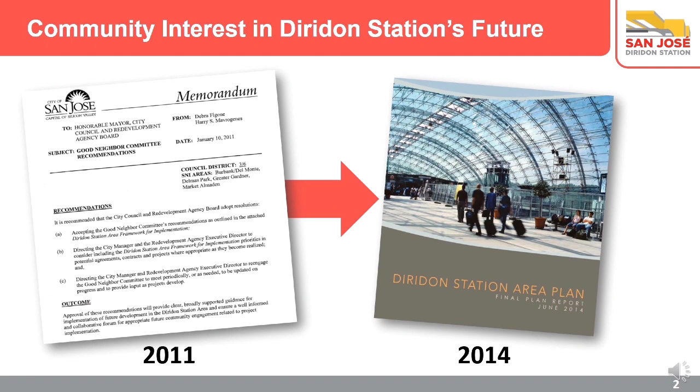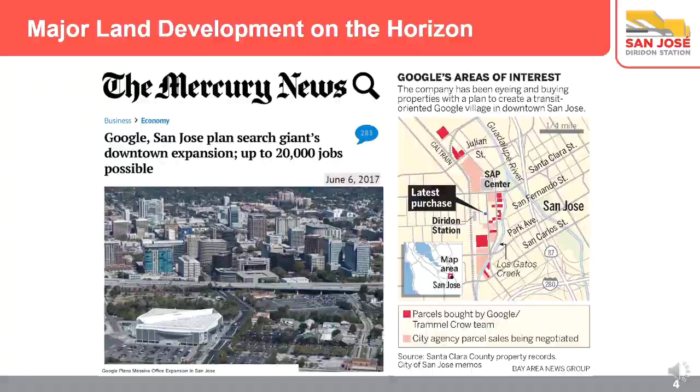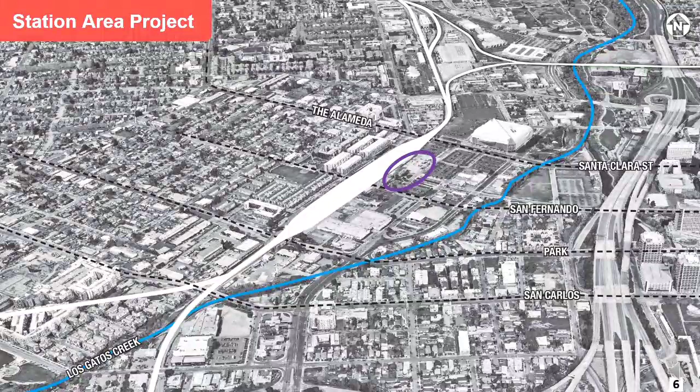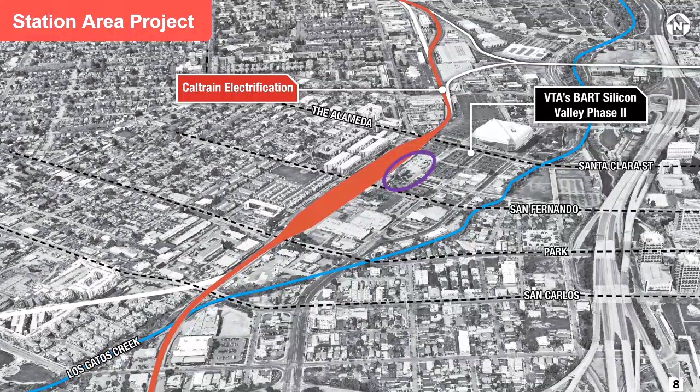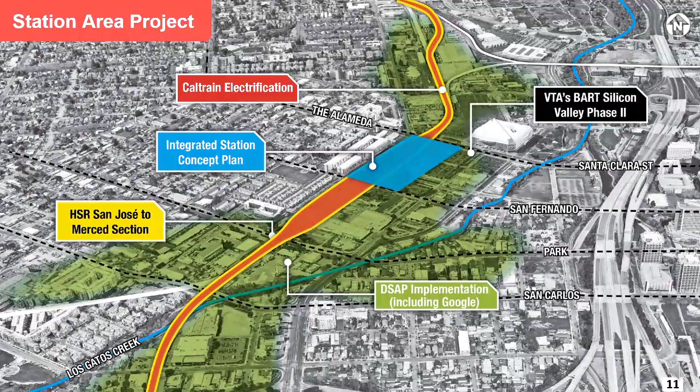What we're working on is thinking about how the Diridon Station will evolve and change into the future. We have many advocates who have been thinking and working with the partner agencies on what the future could be for Diridon, including helping with lessons learned from different examples, thinking about different policy issues. SPUR in particular has been very engaged, and they were a major reason that Santa Clara County leadership was able to take a 2017 European station tour to look at how to integrate transit stations better with the urban development.

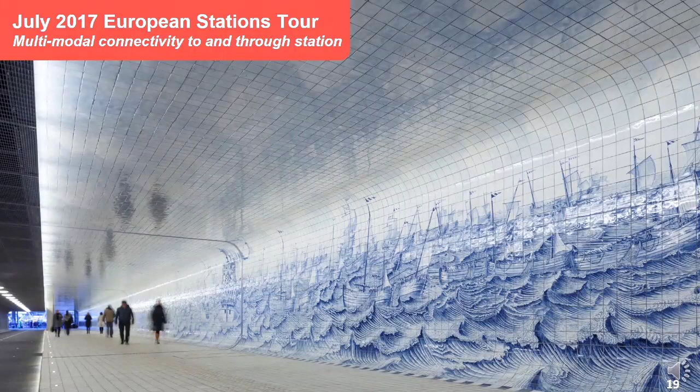We also visited stations in Amsterdam and got to see how the station itself can have connectivity both to development as well as different modes, and how important multimodal connectivity is, not just to the station from parts of the city, but also through the station in terms of bikes and peds and different modes, and how that space can really be done in a lively way, in an artistic way.

So the four partner agencies, when we came back from the trip, decided to get together and enter into a cooperative agreement, a formal co-creation environment where they are working together to think about how to integrate Diridon Station, not only as a multimodal transit center, but how it relates to the city. So it is a twin project of city building and transportation.

They created a vision for the station. We really want to deliver a world-class transportation hub that provides seamless customer experiences to move between the modes, but also to move between downtown San Jose and the neighborhoods to the west.

In the beginning of the planning process, we started with developing key objectives. These are things that would be a touchstone throughout the planning process to help the partners measure different options or ideas, including how well the station is multimodal and integrated and human-centered, really speaks to the passenger experience.

We want the station to become a catalyst for the urban environment. We want it to support land uses and really inspire a good sense of place. We also want the station to be a destination, a place that people like to come to, that San Joseans can come and hang out at.

We want to create a compelling vision for the future, both in terms of something we will be reaching for in the long term. This is a long-term project, and we want to understand why it's important to keep doing it.

In the wintertime, we started looking at key elements like how the tracks and platforms relate to the station's center of gravity, where the entrances might be. In the spring, we started to develop possible layouts, different combinations of the elements into an organized layout. Over the summertime, we worked on optimizing.

And throughout that whole process, we talked to the community about the different themes that were important, about pros and cons, about priorities, and received feedback throughout, which has helped us develop the concept layout we're going to show today.

So just a quick overview: what is a concept plan? What we've really been focused on in the last year is the fundamental functional elements as they relate to each other in the space. This is an example from a Dutch project brought to us by Team ABC, but it demonstrates the Lego blocks that become the organizational foundation for the station elements. We're going to talk a little bit more about that.

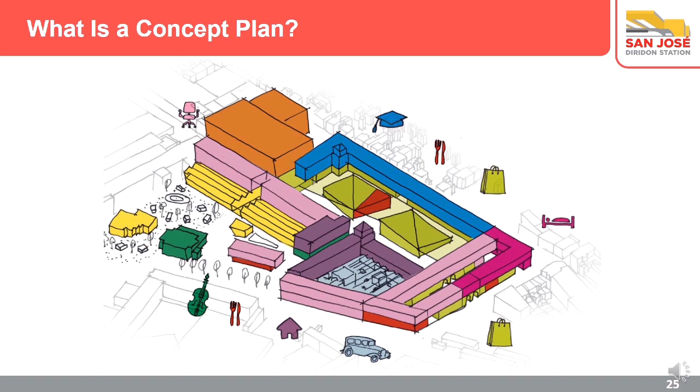So first, we started with the big moves, and we looked at how the northern rail alignment and the southern rail alignment work, coming into the station from San Francisco and leaving the station to go towards Gilroy. We then looked at the vertical platform position.

Should they be up in the air slightly? Should they be at grade? And then we looked at different station locations, and should it be at San Fernando Street or Santa Clara Street? We're going to show a little bit about that.

So these puzzle pieces, or Lego blocks, become a really important foundation as we start to explore how to insert the kit of parts: the pedestrians and bikes related to the station entrances or station locations, how the BART station relates to the station entrances and transfer times for passengers between the heavy rail modes and BART, how the VTA light rail and VTA buses would be organized relative to the station entrances, the public spaces, and the commuter rail corridor, and finally how taxis, TNCs, and automobiles would access the space and where we might imagine parking could be located.

Over the last year, we've presented three different types of layouts. These layouts represent a spectrum of different combinations of the big move and the kit of parts. We started with one that was at grade at West San Fernando Street, so the station center of gravity was really oriented and anchored at San Fernando, and then we organized the elements accordingly.

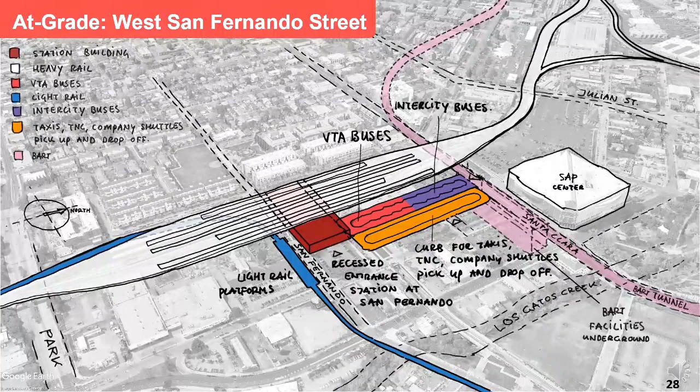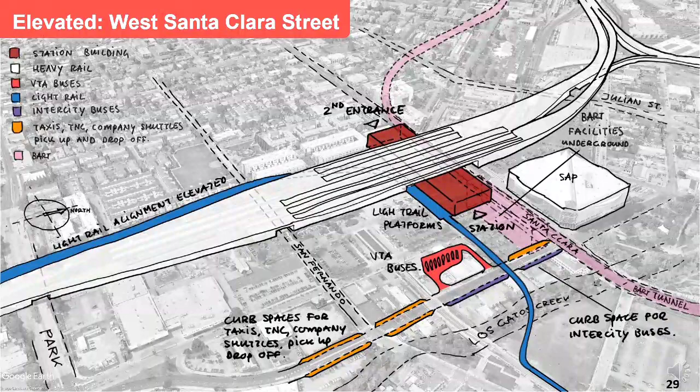We had one that is elevated at West Santa Clara Street. So the station platforms now have been raised slightly into the air, about 25 feet. The station center of gravity was really oriented at Santa Clara Street, and in this particular case, we actually attached a northern and southern rail corridor that contemplates an I-280 viaduct.

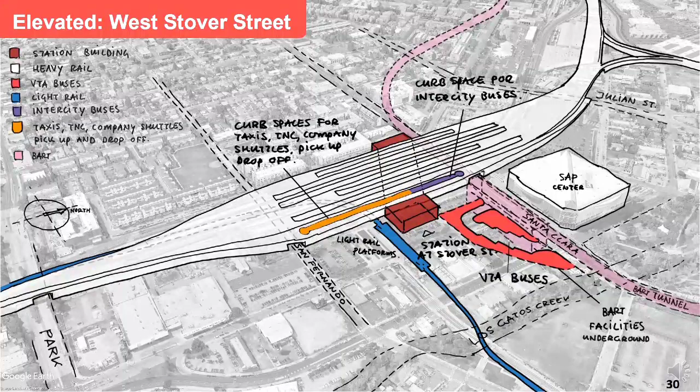And then we had one that was an elevated station with a West Stover Street orientation. This elevated the station platforms, but oriented the center of gravity kind of in the middle between Santa Clara and San Fernando. What we were trying to explore is the different ways that these elements would create a passenger experience and how the modal elements would function.

We also did several community events, including several community open houses. We did a significant Big Moves workshop in September. We've presented routinely at the Joint Policy Advisory Board, and we presented throughout the year at the Station Area Advisory Group. So we've done a lot of different events to reach out to the community.

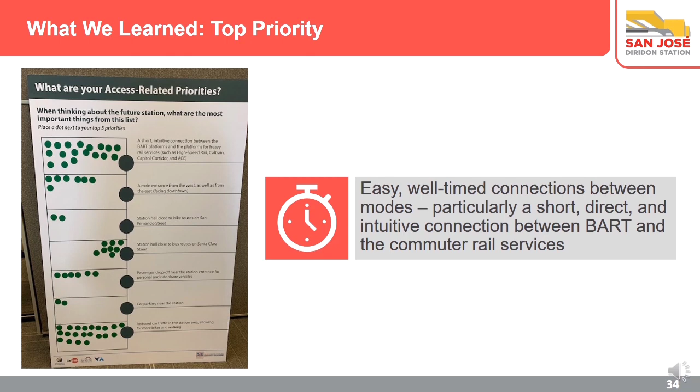In terms of general community aspirations, we heard these several items over and over as we did community outreach: improved transit serving the station, a highly visible and iconic station, creating a place with activity centers near Santa Clara Street. Our community wants vibrant indoor and outdoor public spaces. They really want a street that's pedestrian and bike friendly while we're reducing car traffic, and we really want to make sure that there's a potential for future transit-oriented development around the station.

So that sort of gets at and echoes what the partners had identified as the twin pillars in terms of transportation blending into city building. We heard that from the community as well.

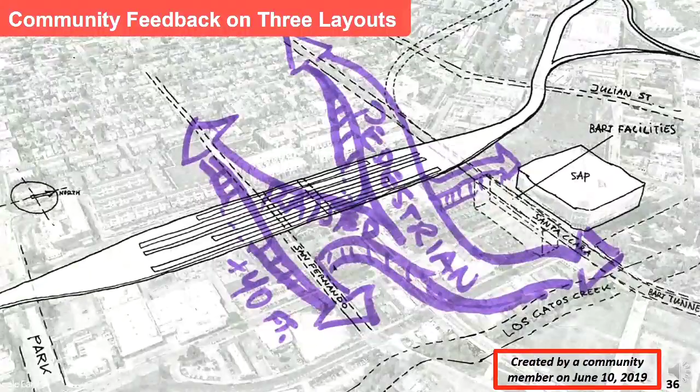We also heard many, many ongoing questions. I always say when I present that this part of the planning process will raise more questions than it answers. So we hear a lot about what effect the increase in train volumes would have on property impacts, and will it create safety issues at at-grade crossings?

We hear a lot about whether construction and increasing activities will result in disruption to nearby neighborhoods. Will the expansion of Diridon Station lead to displacement? This is an extremely important topic of discussion, not only in San Jose, but in the Bay Area region in terms of community displacement.

We also get asked quite frequently about how this project relates to the high-speed rail project. How will parking work in the area? What are we going to do at the historic depot? How are we relating to the Google project? And how will we have a direct airport connection? So again, lots of questions coming up, and as we advance the planning project process, we will attempt to start to unpack and answer these questions.

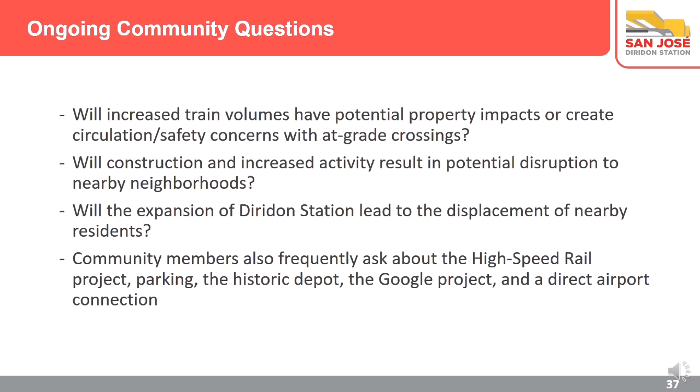So we're going to present now the recommended concept layout. I'm very pleased to show three major decisions that the partner agencies are ready to put forth as a staff recommendation to the policy body, anticipating City Council and the three transit agency boards would accept these recommendations. We're going to step through each one of them.

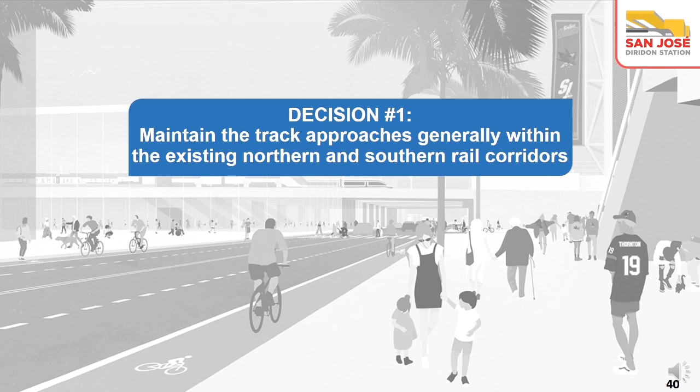Decision number one is to maintain the track approaches generally within the existing northern and southern rail corridors. This is an overview of that recommendation and what it would look like: coming in from the north on the Caltrain corridor, generally in the same right-of-way as today, moving through the station to the south towards Gilroy in roughly the same Caltrain and Union Pacific right-of-way that exists now.

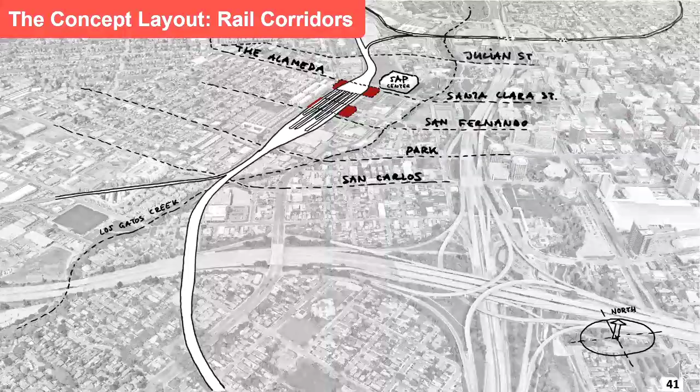When we started doing the technical analysis, we got asked over and over again to think about future-proofing the rail corridor. Rail corridors are 100-year investments, and we wanted to make sure we were looking at the right investments for the future to ensure we don't come back and have to rebuild things or underserve capacity. So we started by exploring to the north and to the south what that might look like.

This image is based on conceptual design done by the team Arcadis. It contemplates non-electric diesel tracks, which we will need to continue to operate ACE and Capitol Corridor and the Union Pacific trains, as well as new electrified track for Caltrain and California High-Speed Rail.

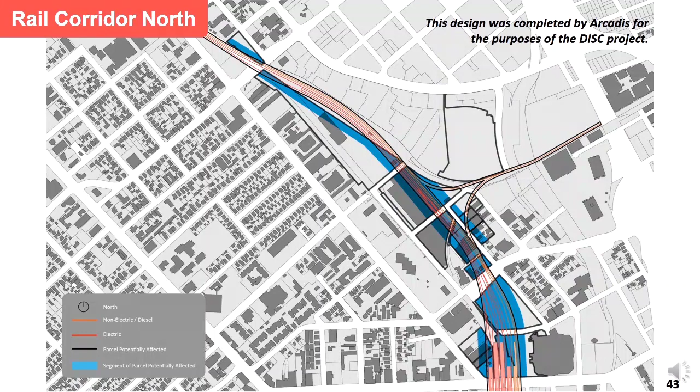This image shows an outline of the parcels that directly abut the rail corridor, and what we're showing in blue are the segments of parcels we think might be affected by the slight expansion of the existing rail right-of-way. We don't exactly know what these impacts might be. It could affect a driveway, a sliver. We need to do more design to fully understand those impacts, but this is what we think could happen in the north.

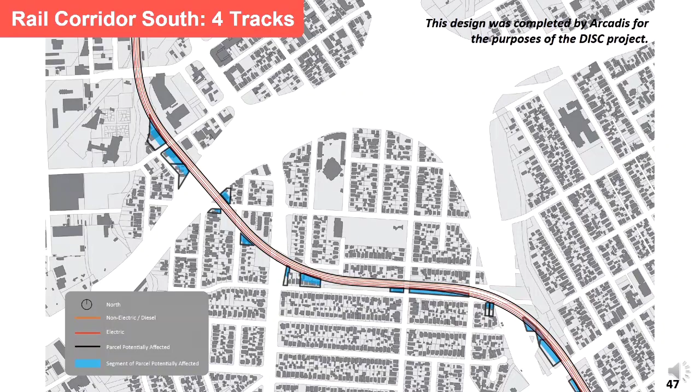The project team, Team ABC, did quite a bit of work to investigate the I-280 viaduct also. So this is our Santa Clara layout, just as a refresh, that shows to the south of the station a corridor that would still be in the existing rail alignment, and a new I-280 rail viaduct.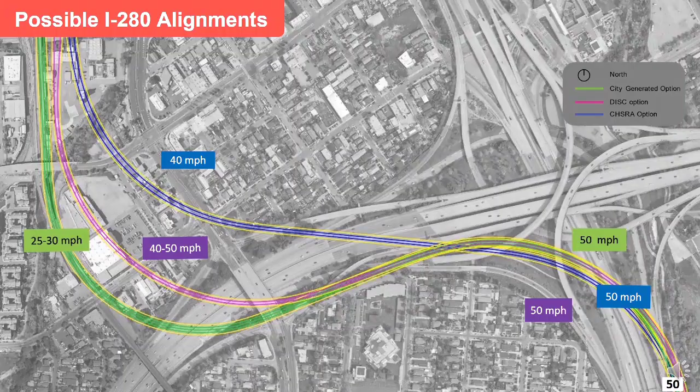So we did a pretty deep dive with technical information at this workshop. That material is on the diridonsj.org website, so folks can go back and take a look at the different benefits and trade-offs that we talked about with the community at that time.

So what we're showing here is the Santa Clara layout. We did quite a bit of work to explore the different ways that the electric trains would need to cross with the diesel trains, to ensure the electric trains are getting up onto a new viaduct in the right way, to align themselves to access that new guideway.

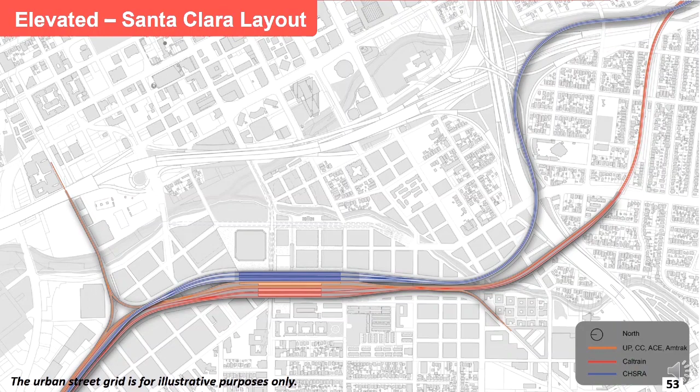What we're showing is a northern flyover there. You can see the blue lines crossing the orange and red lines to allow for the high-speed trains to get onto the new viaduct that's going to the south. This is the best layout that has the least amount of community effect in terms of roadway impacts to the south.

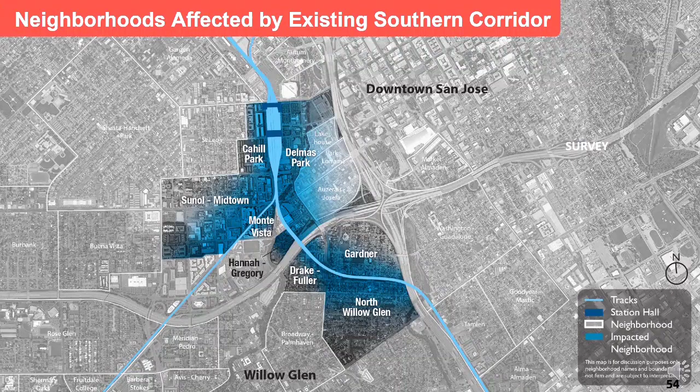We also took a look at how a new viaduct might affect different neighborhoods. This image shows the different neighborhoods in San Jose currently experiencing the existing southern corridor, and the difference when we add a 280 alignment. What we found is that there are now new neighborhoods that weren't previously affected by this new guideway that would experience some level of effect, whether good or bad, because of the new 280 viaduct.

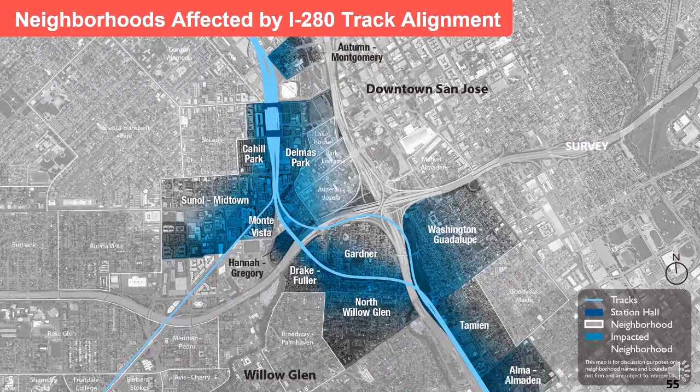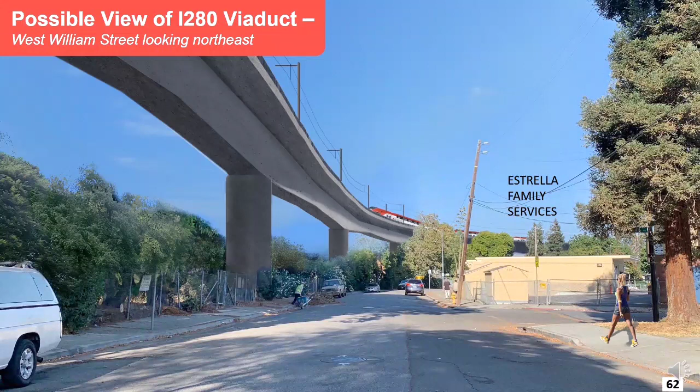One important consideration about the train pathways is to explore whether or not all of the trains could be eliminated from the existing corridor. We can't get Union Pacific, ACE, and Capitol Corridor off the existing alignment, so at least they would always remain on the existing corridor.

What we did explore is whether or not we could get Caltrain and high-speed rail onto the new guideway. What we found is in order to do that, we'd have to elevate Tamien Station, which creates a new impact to a neighborhood that's experiencing an at-grade station. So the difference is only high-speed rail accessing the I-280 guideway, or high-speed rail and some Caltrain. What we found is it's very challenging to get all of the electric trains onto the new guideway and eliminate them from the existing corridor.

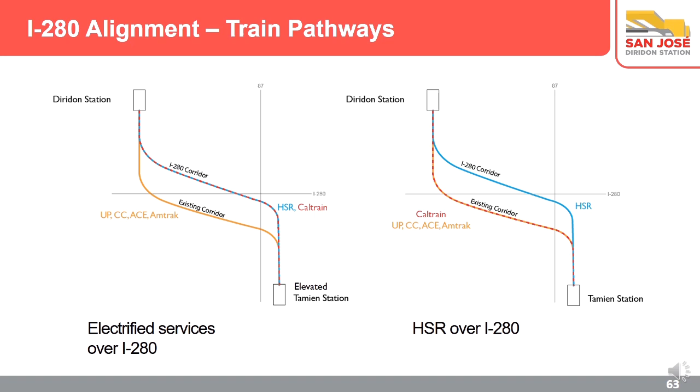We also wanted to look at what it would look like for neighborhoods that don't currently have this level of infrastructure, which would now have a new, significant, and different piece of infrastructure in the neighborhood.

So the partner agencies really studied the I-280 corridor, and as they advanced this recommendation to largely stay within the existing rail alignments, the partner agencies are committed to making the environment no worse than it is today, and hopefully better through a series of enhancements and tangible mitigation measures.

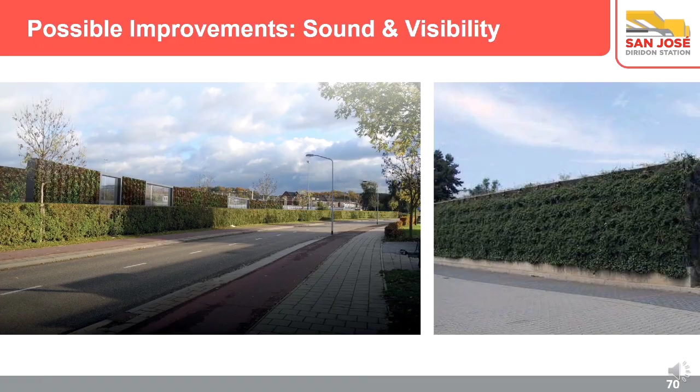What we can imagine exploring, and what the partner agencies will continue to explore, are different ways to block sound and visibility related to the rail corridor. We're showing here some options for different types of barrier walls. These can either block visually or block sound, or both. You can imagine that the wall can be built in a way that allows vegetation to grow on it to increase its overall look and feel.

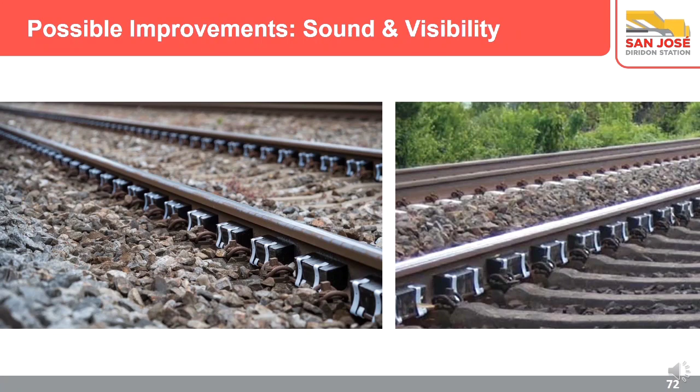We also know that there are engineering things that can be done in terms of how to improve the track bed itself to help reduce the sound from the rail as well as the vibration. These are very technical engineering things that help a modern railway mitigate some of those effects.

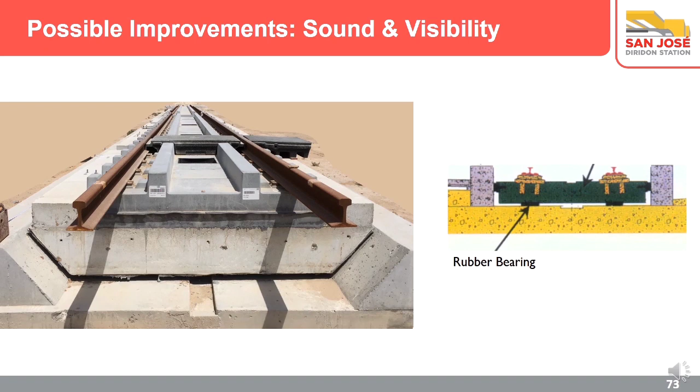And then we hope to embark on a community design process to fully imagine with the community members what the park might evolve and look like over time.

So with that, I'm going to turn it over to Daniel to walk us through decisions 2 and 3 on this concept plan. Thank you, Liz. I'll try to explain what the next two decisions are relative to the concept layout for the Diridon intermodal station.

The second decision has to do with the vertical profile of the station—elevating the station, or elevating the tracks, that is. The reason for that is that one of the objectives Liz was just speaking about is improving urban connections, and improving not just the transit piece, but the city of San José. That also entails creating better north-south connections along the track corridor, and very importantly, much better east-west connections across the tracks.

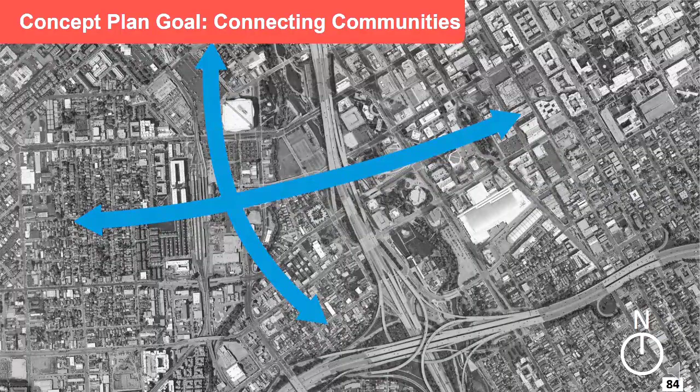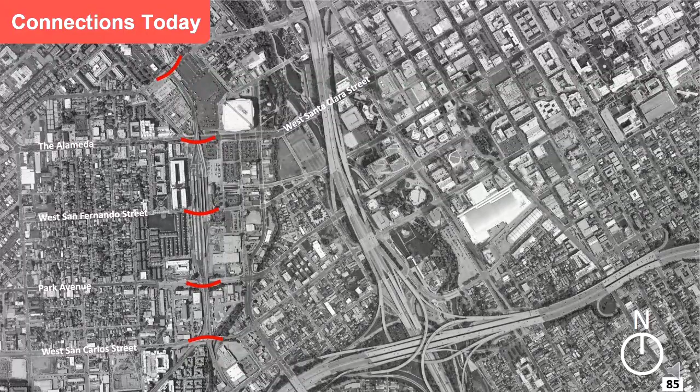Currently, as you know, the track is a barrier in the city that is hard to get across. That's because on pretty much all the streets that cross the tracks—from Julian up north, the Alameda, Santa Clara, San Fernando, and also San Carlos—you either have to come down under the tracks or go above. That's somewhat true for cars, but it's much more of a concern for bikes and pedestrians in the current situation.

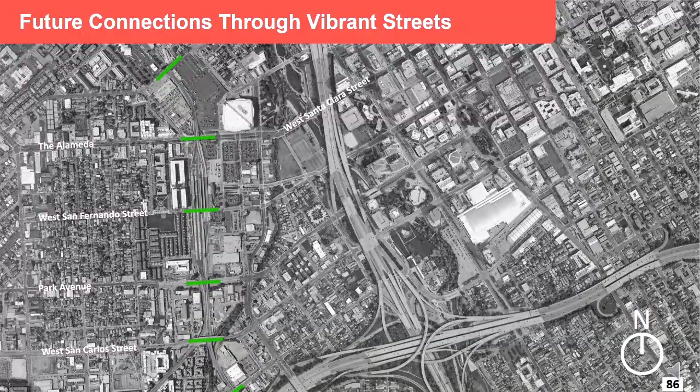So what we're looking to accomplish is to see if all of these streets could be on the ground plane, so that they would simply continue as through streets and allow for much better connections across the tracks in the east-west direction. I have a few examples of that, just to give you an indication of what that could look like and what some of the design thinking is.

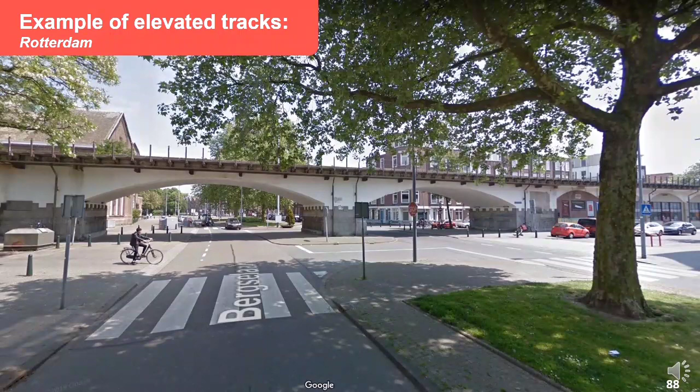Another reference we brought over is a viaduct in Rotterdam—this might be fewer tracks, so it's not completely comparable, but what you can see is that structures can actually be very pretty and don't have to be a problem for the streetscape. Also very importantly, the ambition of being able to see through, so they don't block the continuity of the streets and you can see where you're going, is something that could very well be accomplished by elevating the tracks.

Also, elevating the tracks would allow for room under the tracks to put services, functions, commercial facilities, restaurants, and what have you under that deck. That would allow for activating the streets and creating a more lively and vibrant city.

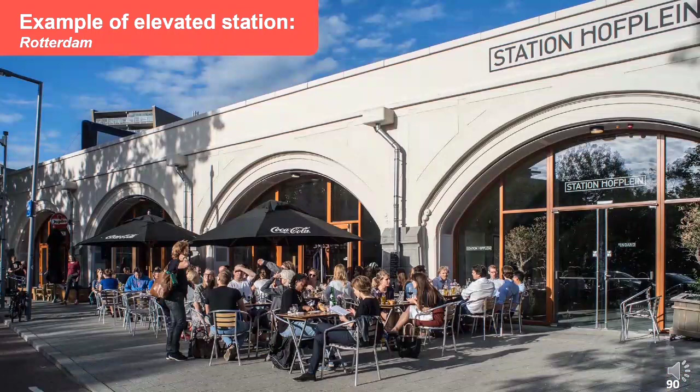So the next decision is how the station would operate and how it would work. We're putting forward a proposal that has two concourses—one oriented to the north by Santa Clara Street, and the other more to the south by San Fernando Street. I'll explain how that works and why that is.

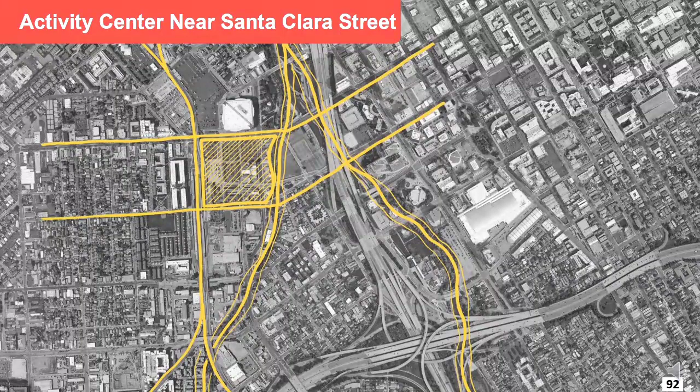That means the focal point of the station should be, we believe, between the current tracks, between the creek, between Santa Clara and San Fernando Street. So this box is where the main focus is of the new urban development, as well as of the most important pieces of the transit modes.

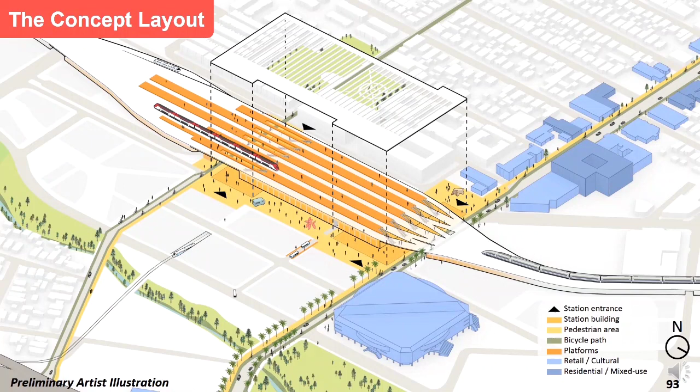So this is an architectural drawing, an architectural impression, a very conceptual preliminary impression of how that could work. So what you're seeing is the elevated guideway with 5 platforms and all of the tracks on it. And what you're also seeing is, by Santa Clara Street, a concourse that would provide access to the station, a northern concourse. And this is a conceptual drawing.

We don't know how that's going to look exactly, but we imagine that a northern entrance might be very useful because of the qualities that Santa Clara Street has and because of the amount of people that use Santa Clara Street today.

Then to the left of the image, you see an additional concourse that is close to San Fernando Street. And that additional concourse would provide access to the platforms for people coming from downtown on San Fernando Street, as well as people that need to be or come from this new urban development that we're going to find south of San Fernando Street.

Now, the idea of this project is that this is not just about trains, but what we're trying to accomplish is to make this facility and this new piece of city as attractive as possible for bicyclists as well as for pedestrians. So all of these ideas are focused at creating very easy access and attractive places for bikes and peds.

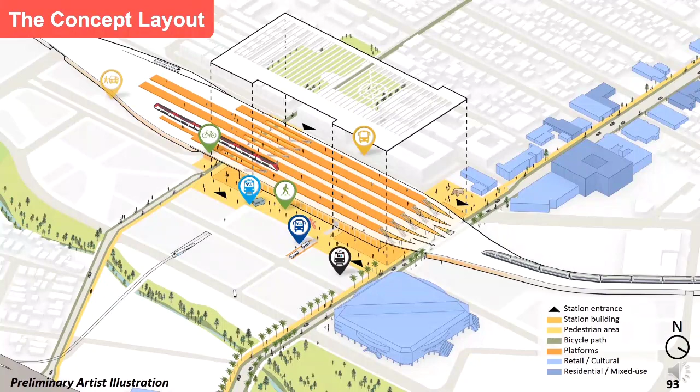Coming in from the south, we could imagine creating new curbs on Cahill Street, close to the station, in a way that is safe and doesn't intersect with the flow of pedestrians and bicycles. So those are the main pieces, the main modes of transit that make up the station.

Now, to give you an idea of how that would functionally work and how you could experience that station in the future, we have a few preliminary artist renderings that give you some idea of how that experience could be. And that begins with the current situation of Santa Clara Street. You all know this. This is walking towards the track corridor with the SAP Center on the right-hand side of the image. And this is how that looks today.

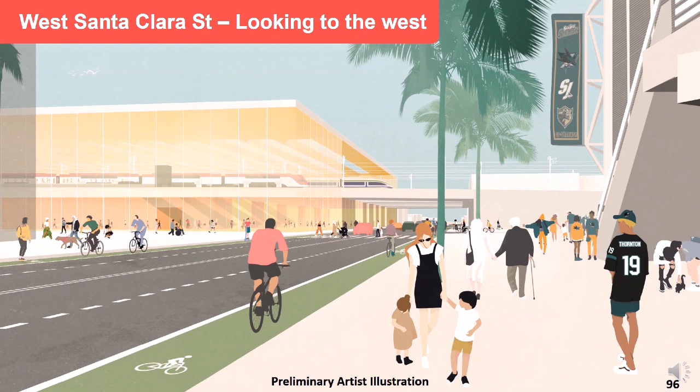Now, imagine if we were to raise the tracks up, Santa Clara Street would simply continue, and you wouldn't have to dip down under the tracks, but you could just continue on your bike on foot to the west of the city.

Now, to the left of the image, what you see is potentially how you would find that station. And we're not saying that the station is going to look this way. This is just where we think the different pieces would go. And the aesthetic quality, the appearance of the station is something that we'll get into later. It might not be a box, it might look totally different. But we assume and we propose for now that the station entrance will be just off of Santa Clara Street.

Why that is, because it will be very easy to find, and you would have an intuitive way of finding from Santa Clara Street to the station entrance. You really couldn't go wrong.

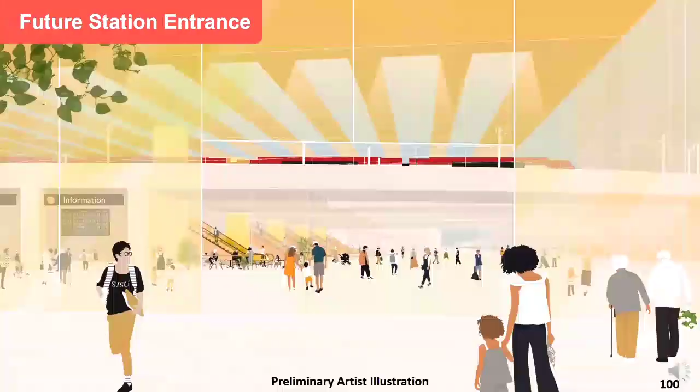Looking towards the tracks, currently this is how that looks today. And in the future, that might be the entrance to the station. Again, we don't know how the experience or design would look, but the objective would be to make that as intuitive as possible.

Having entrance space at the beginning, where you would also buy your ticket and find travel information, as you see on the left of this image, and then intuitively move into the concourse right ahead of you. You could possibly even see the trains on the deck, so you would understand automatically where the trains are and how to get to the platform you need.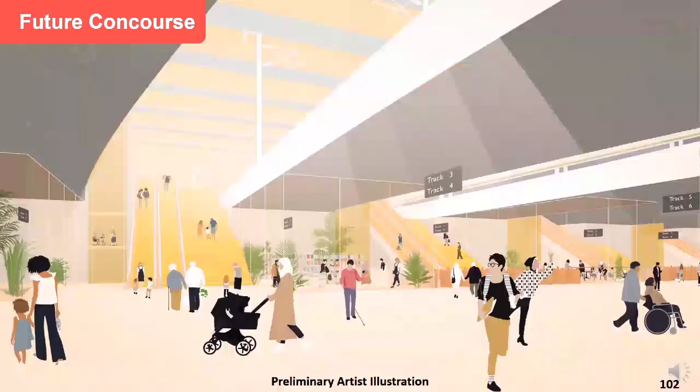And what you're seeing here is escalators and stairs that lead to the different platforms. You really couldn't go wrong because you could see up there and see the way to the platforms.

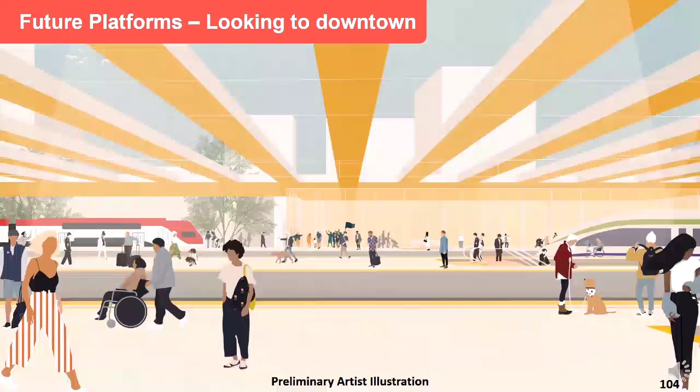But the objective for the platforms would be to have a great experience designed for people, designed with the user in mind, a facility primarily for people where the trains come in to serve people, not the inverse. You would also have a view out into the city, so you would automatically know where the city is and how to get from the station into the new urban core and the existing downtown.

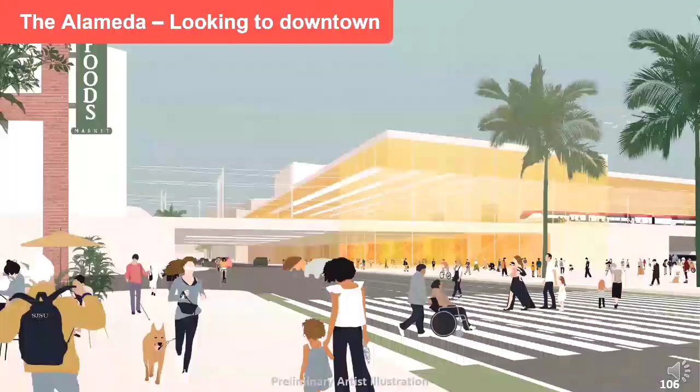What we're hoping to accomplish, by raising the trains, is to have the streets at ground plane again so the city would simply continue. You would have the trains overhead, of course, but we could create daylight openings so that underpass becomes pleasant, and it will be right next to the concourse, so there's liveliness during pretty much all hours of the day.

Also, to the right of the image, you see an additional entrance to the station, which is going to serve a lot of people who live to the west of the tracks currently. We think it's important that they don't have to come around through the eastern entrance, but have an entrance that serves them directly, giving them a very short route from their homes into the station.

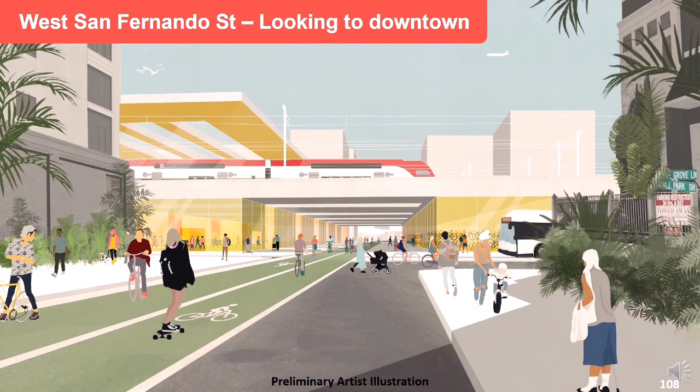And this is San Fernando Street, the southern part of the station, and we are looking towards the current light rail stop. Currently that light rail stop and tracks are blocking any through movement across the tracks because the tracks are on the ground plane. Now imagine in the future what we could do if we raise up those tracks, creating a connection for bikes and pedestrians especially across the tracks.

San Fernando Street is currently turning into an important connector for bikes, even more so in the future we expect. Therefore it could be very useful to enhance that quality and extend San Fernando Street all the way from the west side of the tracks towards downtown.

Again, to the left of the image you see that southern station concourse that would either be on San Fernando or just off of San Fernando Street, providing southern access to the station from this side. To the right of the image, you see the suggestion of a bike storage that could be very close to this bike lane, so you could easily get to the station by bike, park your bike in that storage, and then find yourself at the platform very quickly and smoothly.

So those are the main pieces that the multimodal hub has, and the important elements are again the elevated deck of the trains, having all of the modes compactly and conveniently integrated into the city and very close by the station entrances, and having urban connections on Santa Clara and San Fernando Street that are a great improvement on the current condition.

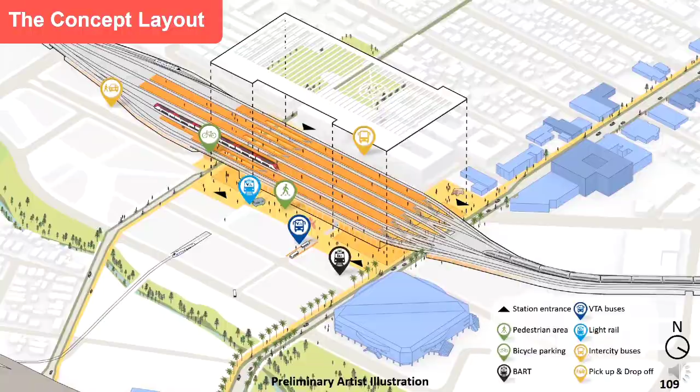So just a recap or summary of the outreach events we expect to complete as we move through the process. Today we're doing the online town hall, and what will happen next is the 4 partner agencies will go to their policy boards. San Jose City Council on December 3rd, Caltrain and VTA on the 5th, and California High Speed Rail on December 10th.

The partners at the staff level are asking those policy bodies to accept the concept plan layout, and the 3 main decisions that we've put forth. If they accept those, then we conceive that we would move into the next steps of the planning process.

This includes continuing the planning and conceptual design work over the next year. We would be exploring what Daniel presented in terms of the modal elements and how they interface with the urban landscape, and we think we have a lot of collaboration to do yet with the City of San Jose and the DSAP process, as well as with the Google project.

We would continue to explore the conceptual design of the track alignments and rail operations. We need to study the best options to organize and govern the future station, so there's some policy planning work to be done in the next year. We want to start to think about how to build a viable financial plan for this program, and ultimately develop a roadmap to implement the project, including what strategies we might employ with environmental clearance.

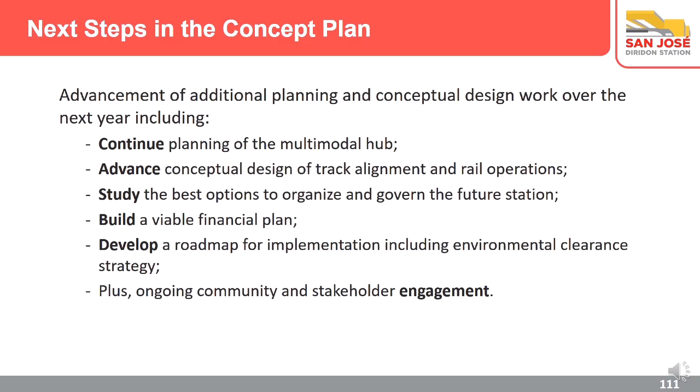So with that, I think we'll turn it back over. Thank you for your attention, and we look forward to continued engagement and community question and answers.